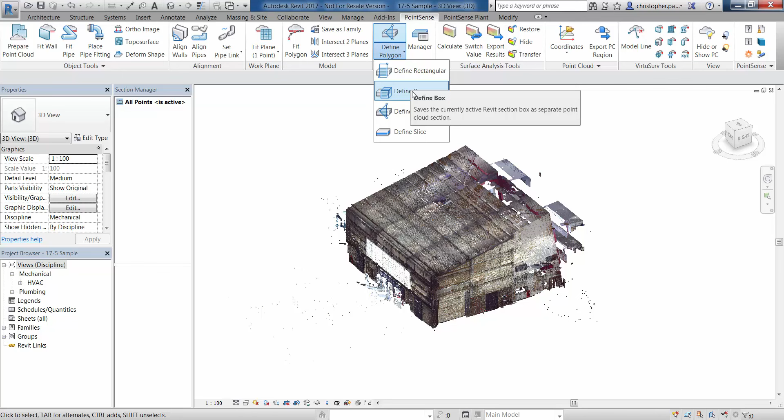Next to the Section Manager button we have the drop down list with the cropping tools: Define Rectangular, Define Box, Define Polygon, or Define Slice.

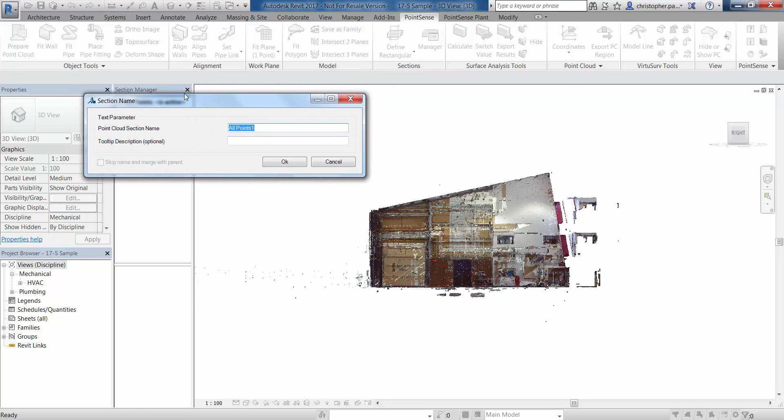First let's look at defining a rectangular crop area and see how this displays in the Section Manager. If I zoom into the right hand side of this scan point cloud and define a rectangular section around the roof, that opens up a dialog box which prompts us to give a section name. We can also put a tooltip description in there if we want to.

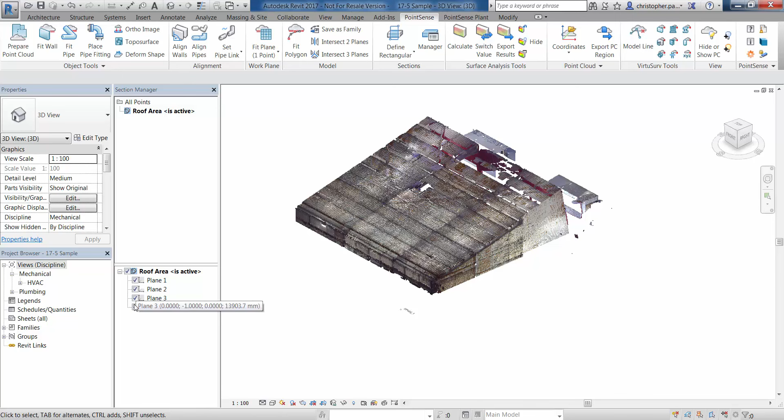If I click OK there, you'll see this is now displayed in the structure tree to the left, and the roof area is now active. In the bottom area we have the different planes that are defining this crop region.

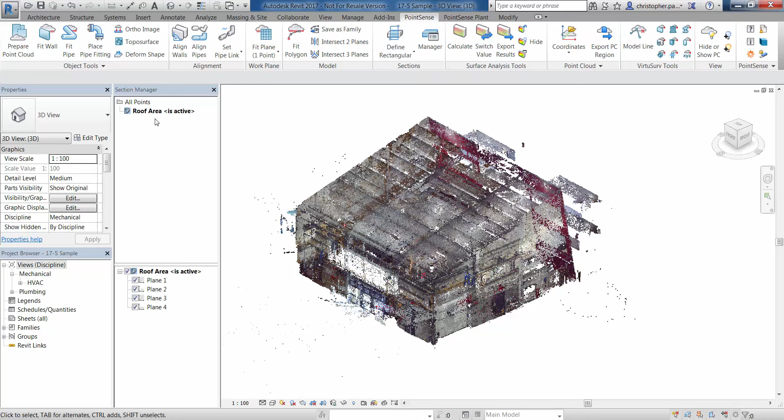If we, for example, turn off that bottom plane, you can see that shows us the points beneath that plane. If I double click on All Points again, you'll see that is now the active section, and we can define a new section beneath this, or define a section beneath the roof area if we wanted to.

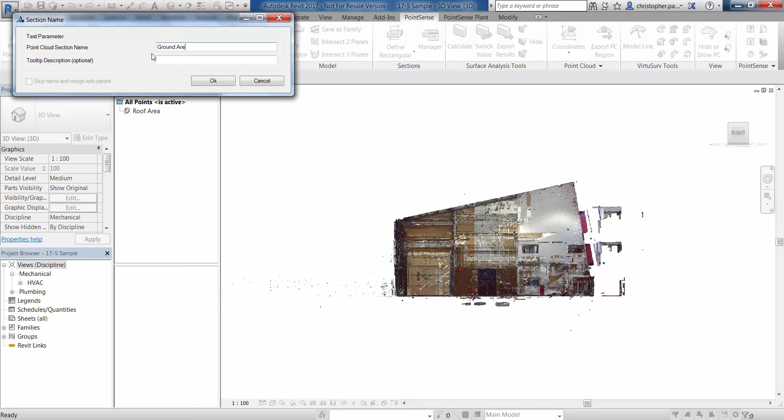So let's activate All Points and go back to the right hand side and define another rectangular crop. Let's activate that, left click at the top and drag down across the bottom. We'll call this one Ground Area. Click OK, and now you can see that is in the structure tree displayed below the All Points folder.

So we have a structured layout of our sections. I can turn these planes on or off again as I did before.

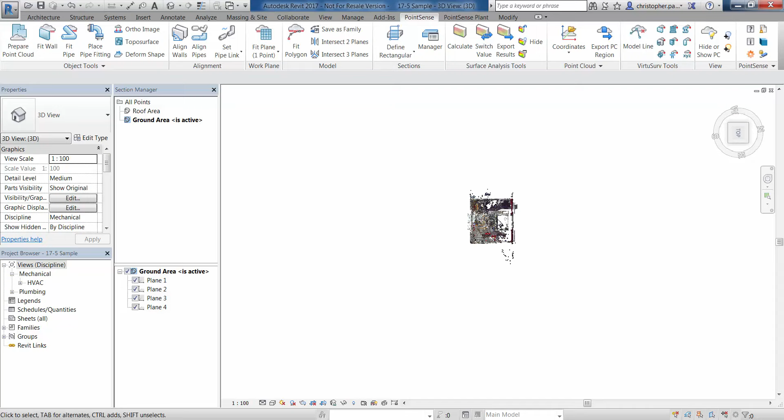Now let's define another rectangular crop, but this time beneath the Ground Area in the structure tree. If I drag a new rectangular crop region, I can name this section, but I also have an option at the bottom left to skip name and merge with parent if I wanted to. I won't tick that this time, so let's click OK.

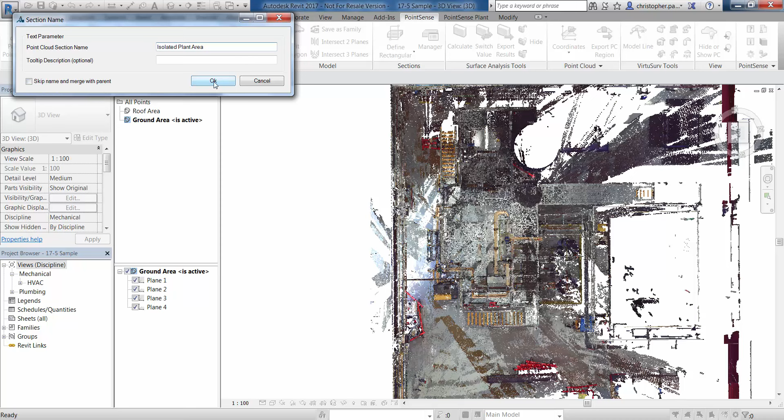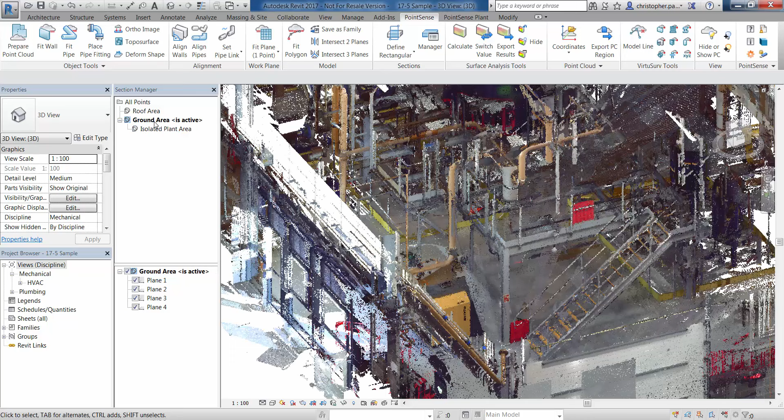Now you'll see in the bottom area of our Section Manager we have additional planes which are constraining this new section we've created. But at the top of the Section Manager this is actually located beneath the Ground Area section, so it's a parent section with a child section.

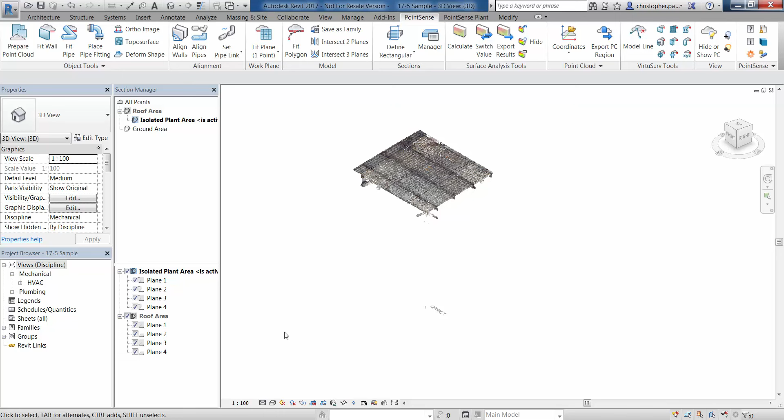If we want to, we could drag this isolated plant area up to the roof area and dock it beneath that as a parent area, and you'll see how that crops the point cloud based on the planes we have in that roof area section now. So let's drag that back down again.

If we want to, we can also rename this section. So we could change the name of this to maybe Target Pipes. Okay, and that renames that there.

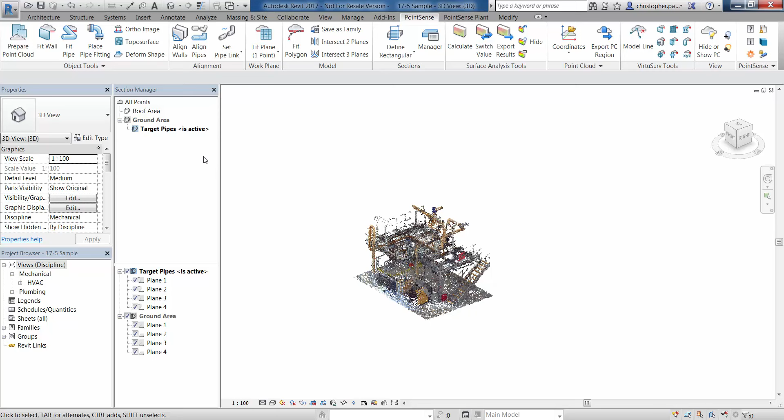What we could also do is merge this section with its parent. If we click this button now, you'll notice all of those planes are now active beneath that Ground Area section itself. So I'll just undo that, click back in the view to crop that again and zoom in.

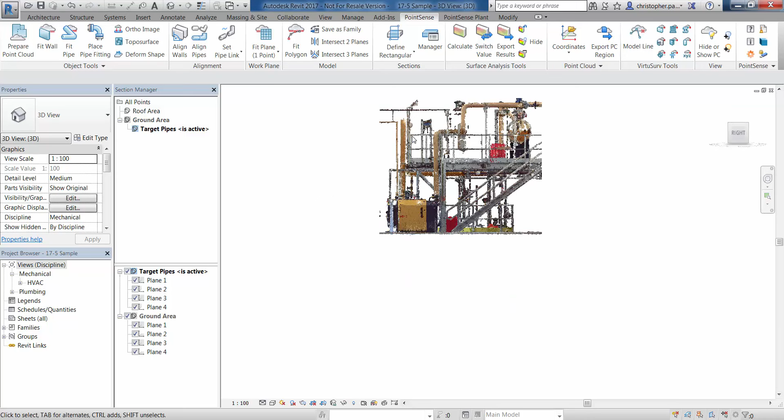Okay, so the next tool we're going to look at is the Define Polygon tool. If I orientate to the right hand side here and zoom in on this example area, we go to the drop down list and Define Polygon. We're going to use single left mouse clicks now around the area of interest, which builds up this polygon area.

We then press the Escape key and we can give this section a name, so we can call this Isolated Pipes Area, and we can also give this a tooltip description if we want to.

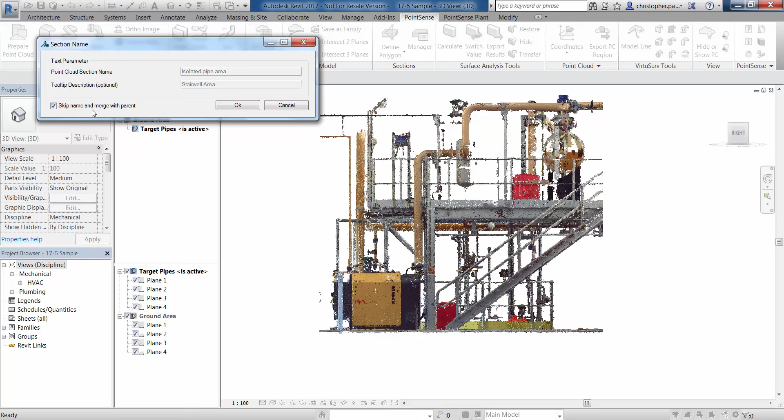In this instance, we're going to skip name and merge with parent. We tick this box at the bottom left, and that will skip the names I've just put in and drop this within the target pipes section. So now we have target pipes, but it actually has 9 planes defined in that area. Let's undo that and go back to our target pipes as they were.

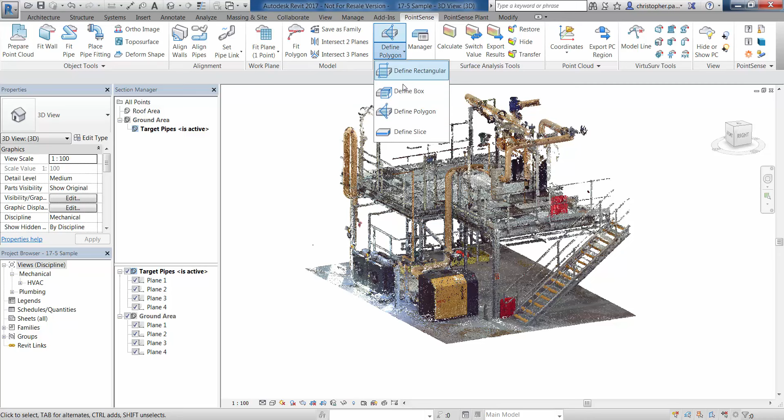This time we're going to look at creating a slice. We go to our drop down list again, this time to define slice, and we have some options. We can make planes that are parallel or orthogonal to either the XY, YZ or XZ plane. We can also have parallel or orthogonal planes to a plane or line already in our project.

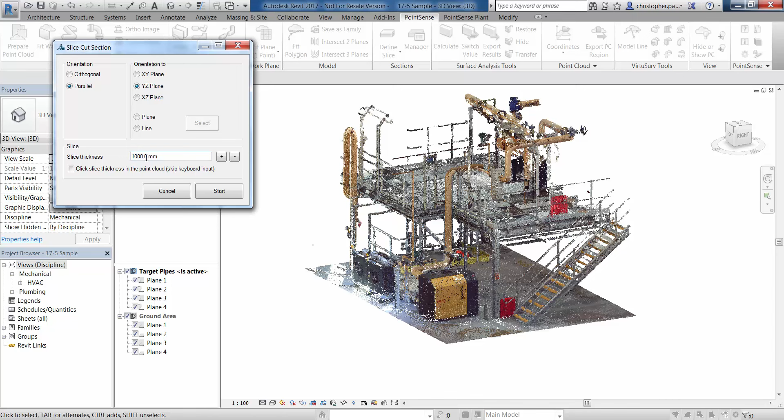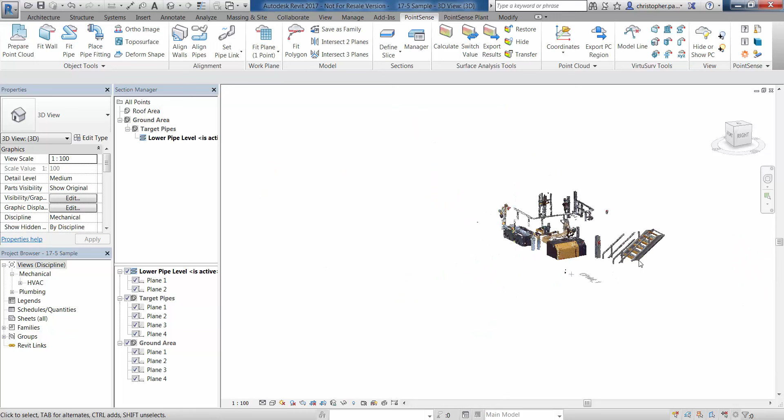In this example I'm going to use a parallel slice, parallel to an XY plane, and for the slice thickness we can define that within the point cloud using selections, or we can predefine it. This time we've got a 1000 mil slice parallel to an XY plane. One click on my pipe creates a 1 meter high horizontal slice at that position. We'll give this a name, lower pipe level, and click OK. Now you can see we've got that slice defined.

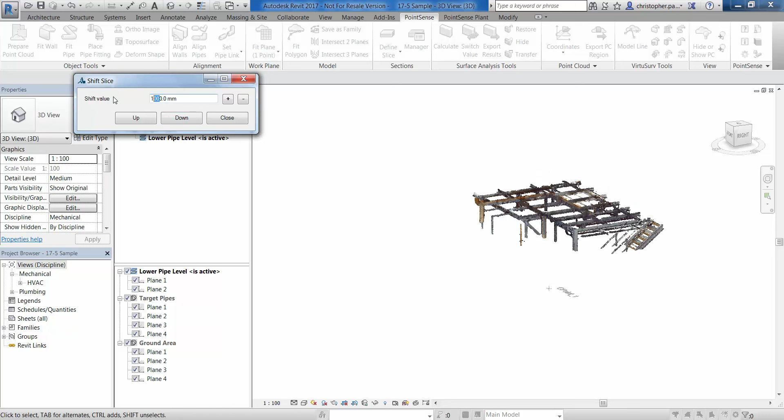That is currently cropped by our target pipes area. If we right click on it and go to shift the slice up or down, the default value is the 1000 we created, but we can change that as we shift it. We could change that to, say, 150 - we still have a meter high slice, but we're moving it up and down by just 150 millimeters at a time.

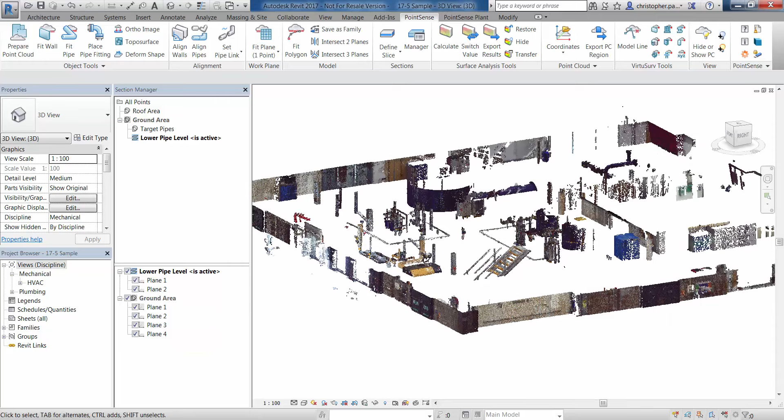Close that down. What we could also do now is drag and drop that below the ground area. That means the slice is actually cropped or defined by that parent crop of the ground area. So now you can see we have that 1000 mil slice, which we move up and down, but it's contained within the parent ground area crop.

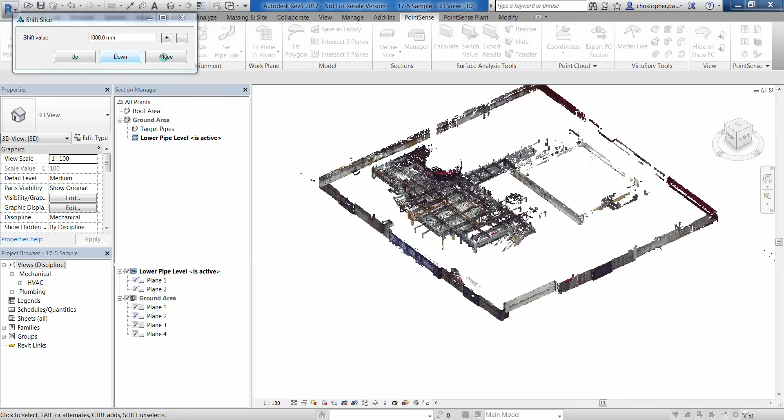So those are different ways we can manage our sections. Let's close that one now and go back to our target area. I'm just going to delete this slice that we created, and this time we'll look at creating a vertical slice. Go back to our target pipes again.

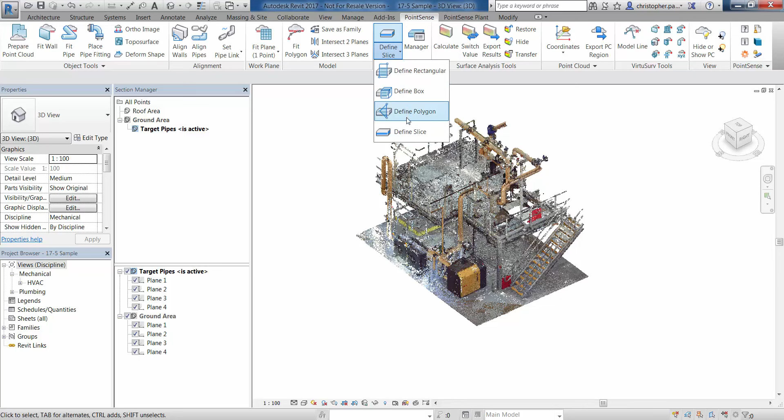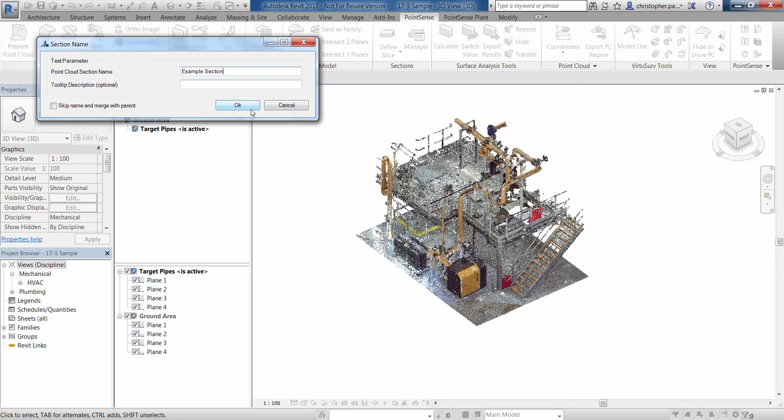Go back to our drop down list and go to slice. This time we're going to use a parallel orientation to a YZ plane, and we're going to define this thickness within the point cloud. We'll press start now - one click at the start and one click at the end gives us the thickness of our slice. We'll call this one example section and click OK, and there we have a vertical slice contained within the target pipes area.

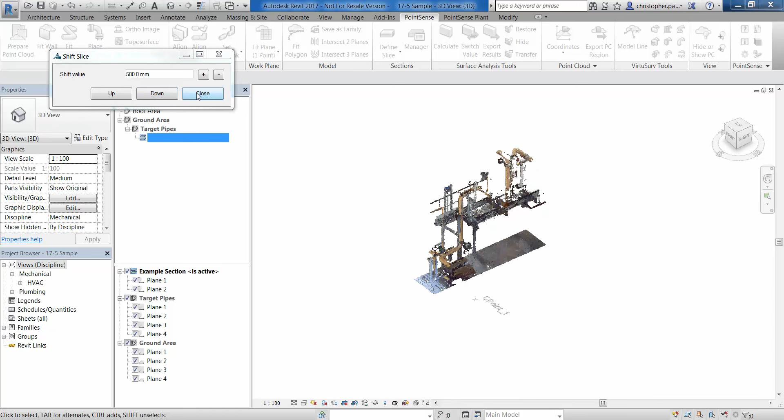That slice was about 1466 wide, but if we change the shift value to say 500 millimeters, we can move that up and down along the x-axis. We can delete that now if we want to, or go back to our all points.

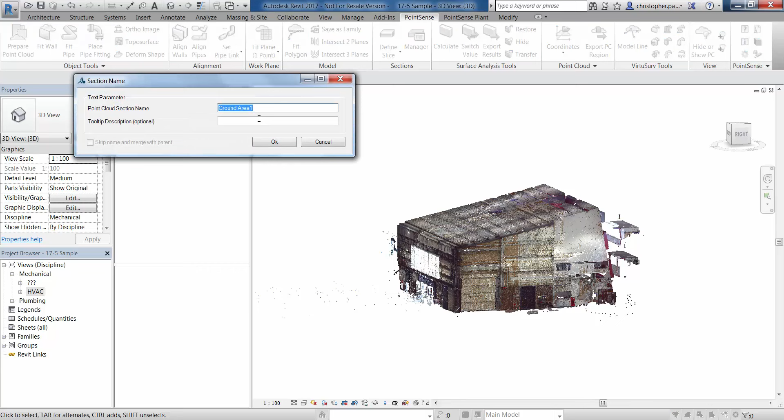The last tool I'm going to show you is the define box cropping tool. This is linked to the section box within Revit itself. What this allows us to do is save section boxes within our section manager. If I add a text section in - this is a text container within our section manager - we'll call this box sections.

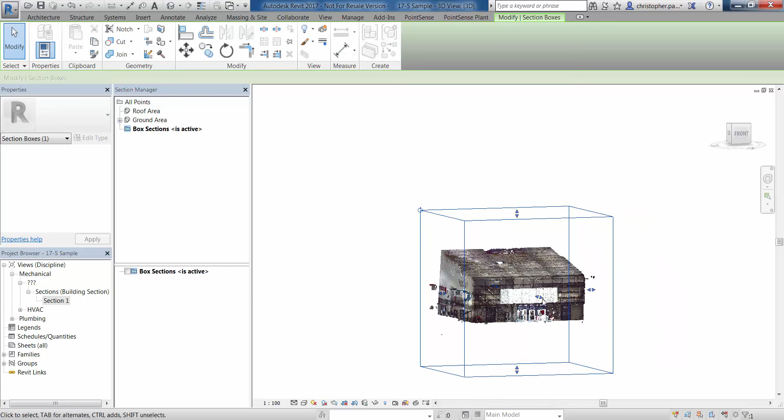I'm then going to activate the section box within Revit itself and orientate the section box to a view. So we've got this section here. If I now go and tweak the section box slightly until we have an area of interest, a target area.

In this example here, I've got some tanks that I might want to crop out. We just crop those tanks out using the standard section box tools. Now I go to my Define Box selection and give that a name - we'll call this section tanks and click OK.

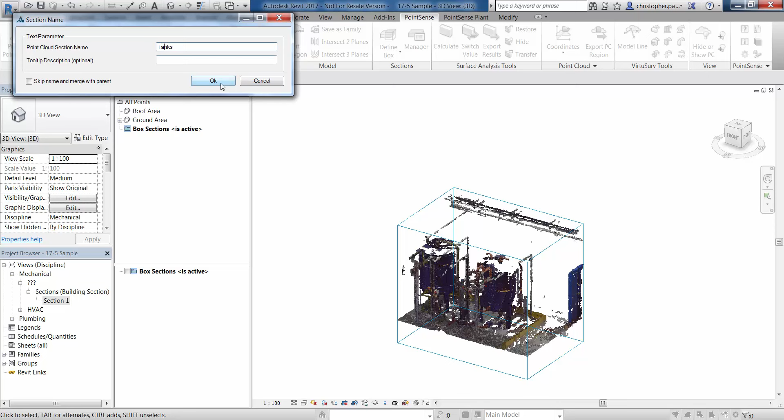Now that is saved within our section manager. If we go to our properties and turn the section box off, you can see that box is still selected. Let's activate all points just to show this, and then reactivate the tanks, and you can see that section box was actually saved there.